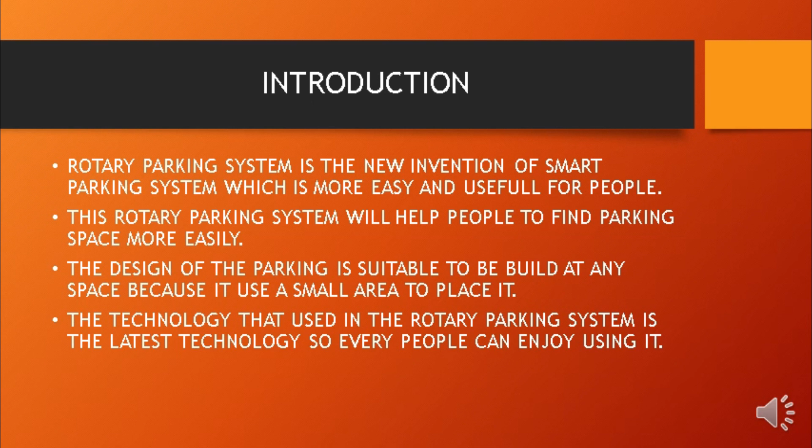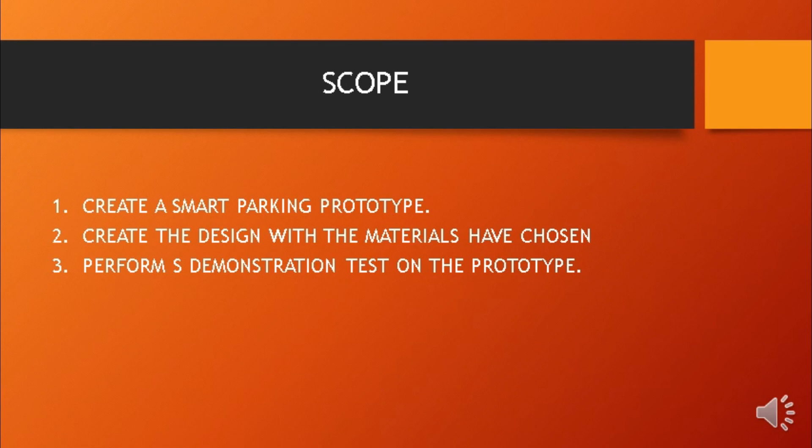The scope of project: first, we create a smart parking prototype. Second, we create the design with the materials we have chosen. Third, perform demonstration tests on the prototype.

The problem definition: first, it is an impact on society and environment, which is we can see the parking lot that already uses a large area that consumes a lot of space needed to build a parking lot. For the rotary parking system, we use a small space to build it.

Second, time - waste more time to find the empty parking space. Third, traffic problem - hard to find parking space. People always will park their vehicle at the side road, which is illegal and make the traffic flow jam.

Fourth, it is about safety. Less safety factor makes people more worried about their vehicle at the parking lot.

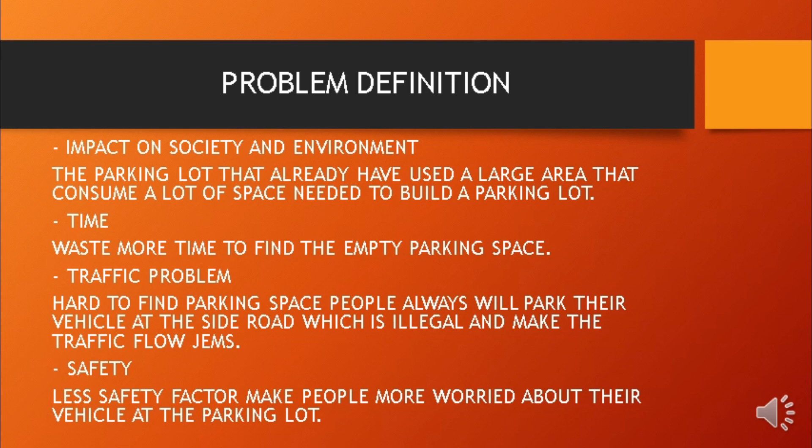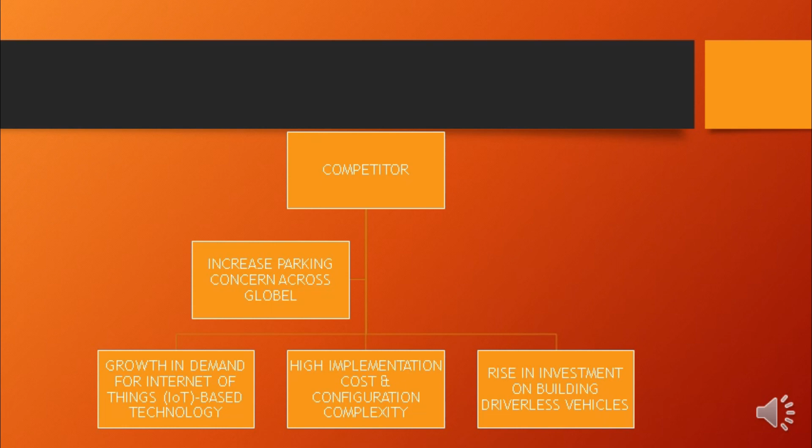That's all for me. Thank you.

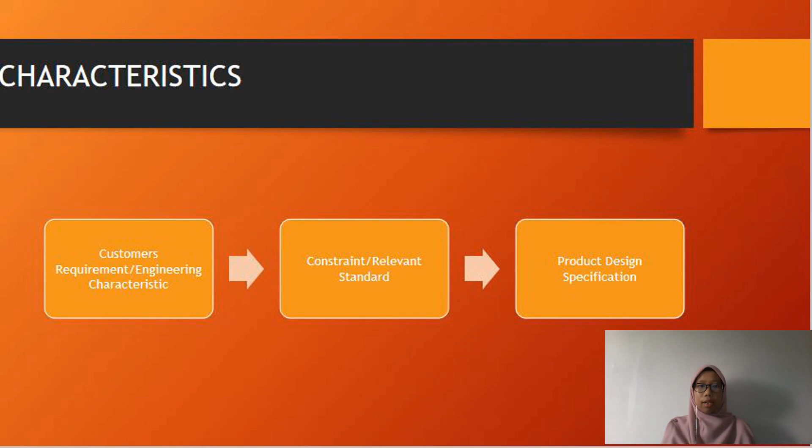Design parameter: there are characteristics needed for design parameter. There are three - first, customer requirement or engineering characteristic; second, constraint or relevant standard; third, product design specification.

First, customer requirement or engineering characteristic. CR is gathered from the customer need to develop the product. And EC is from the product mentioned in the product specification, for the customer to understand the system clearly.

They are such as: if customer requires quick entrance, easy payment, and empty space parking auto detection, so we must include engineering characteristics such as systematic entrance, systematic payment, and a warning buzzer beep sound for the auto parking detection.

And also, if customer requires a big parking space, less failure, and weatherproofing, so we must conclude that we must design the area of the smart parking, and we include the probability of failure, and we must make the parking spot resistant to weather.

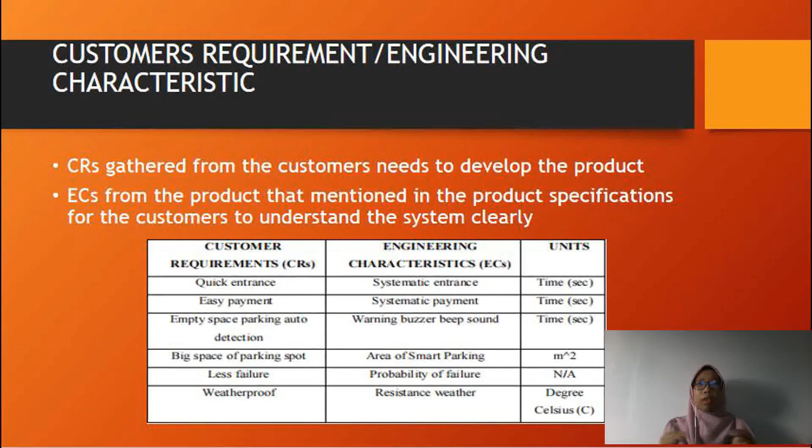The second one is constraint or relevant standard. There are few constraints in this project, such as limitation of scope, cost, specific design requirement, vehicle capacity, environment, and new feature.

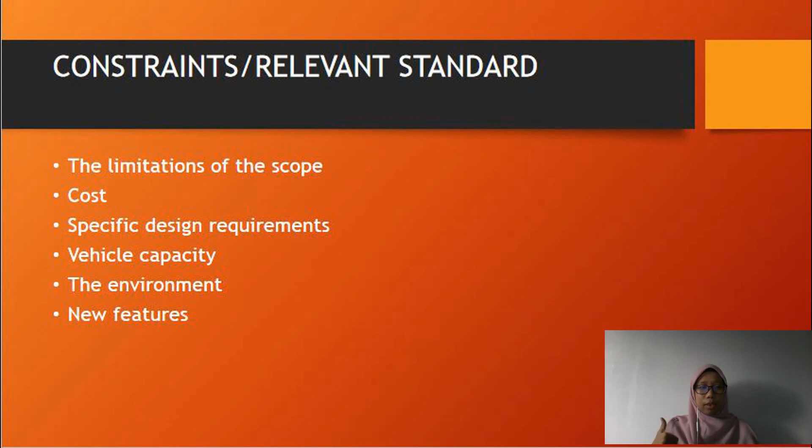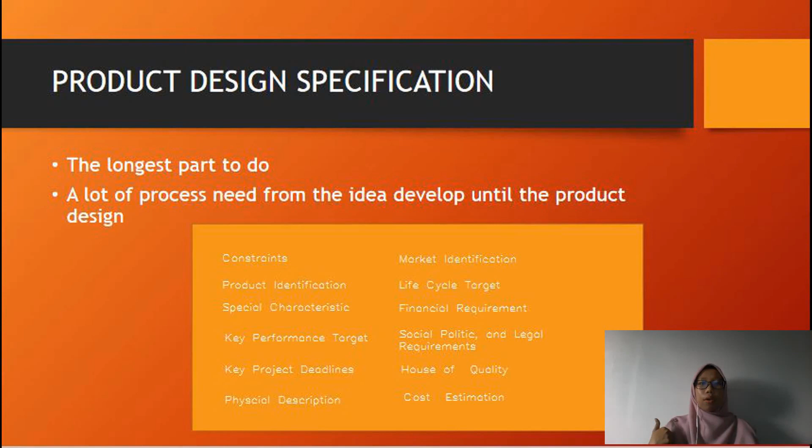The product design specification, or PDS, is the longest part to do, and a lot of process is needed from idea development until the product design. This includes constraint, product identification, special characteristic, key performance target, key project deadline, physical description, market identification, life cycle target, financial requirement, social, political and legal requirement, house of quality, and cost estimation.

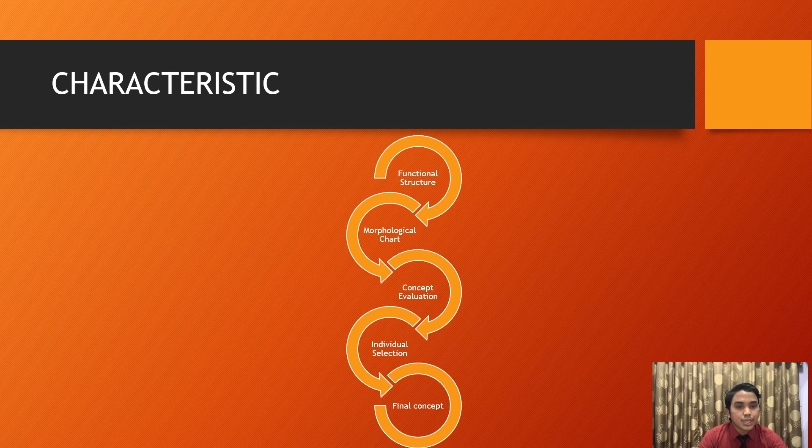I will present about the concept design of the rotary parking system (RPS). A flow of method had to be followed in the design of the rotary parking system, beginning with concept generation, which includes a functional structure and a morphological chart, and ending with concept evaluation, which includes screening the idea, creating a Pugh chart, objective tree, and weighted decision matrix. After that, it will be complete with the final concept.

Function structure. Based on the figure, it shows the function structure of the rotary parking system. For the first step, make a parking payment to enter the parking area. Then park the vehicle on the platform provided. Next, leave the vehicle and put the code on the system provided to park the vehicle. After the code is inserted, the rotary parking system automatically functions to pull the vehicle inside the building. Finally, the mechanism rotates vertically in order to store the car.

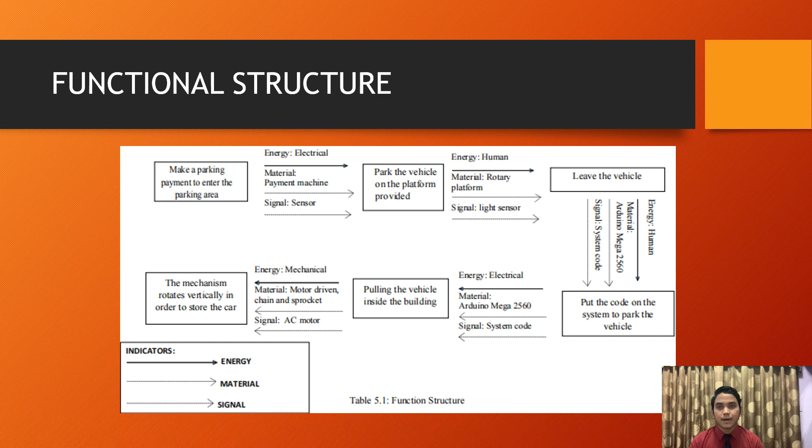Morphology chart. A morphology chart is a technique for visualizing and exploring all of the relationships in a multi-dimension problem. It is one of the most important techniques in the process of developing a product design. We present many concepts based on specific needs that must be met. The morphology chart representing required product parts must be referenced in the design idea, and it illustrates several components that must be considered to produce the most effective and appropriate idea.

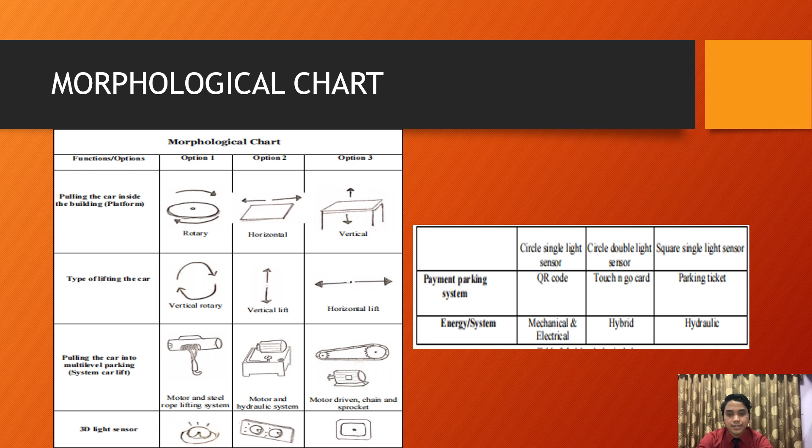The morphology chart for this product needs to be agreed upon by each group member to produce the best product design. As shown in the table above, there are three types of solutions for each function.

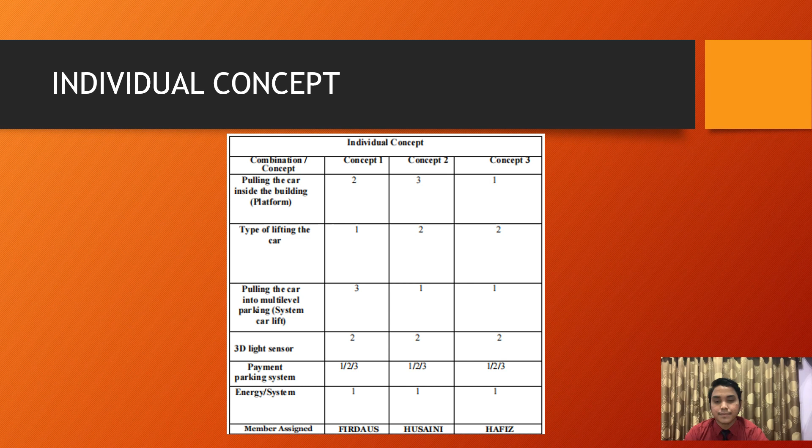Individual concept. As shown in the table, these are individual concepts for the rotary parking system. We present three concepts to produce the rotary parking system, in order to select the best product.

Individual concept 1. This concept is made out of a single automated mechanical system that spins perpendicular to the ground. Car parking and retrieval are dependable in this manner. It rotates in a circular motion powered by the reducer, and the transmission device rotates the parking pallet for automobile parking and retrieval.

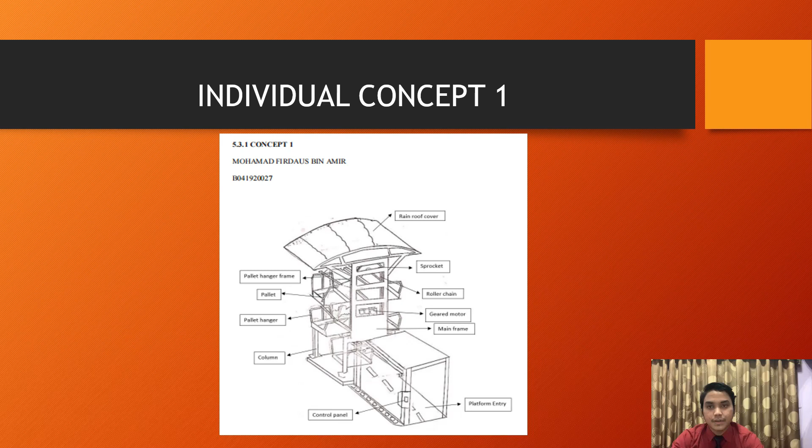Individual concept 2. This concept is a system meant for parking cars in tight spaces, like driveways, thus using the space most effectively in small and middle-sized buildings. The system operates in a manner similar to a conveyor type chain drive arrangement. It can be installed in underground basements as well as podium levels. The operating principle of this concept system uses a lift to move the car up and down, and the lift can be utilized to put the car into the cycle.

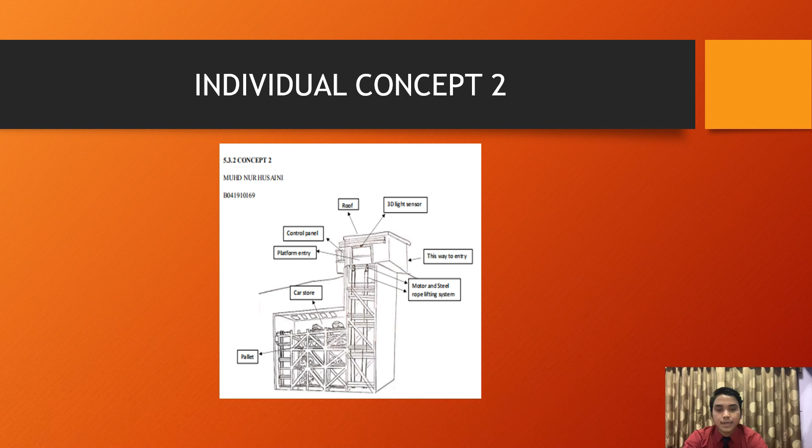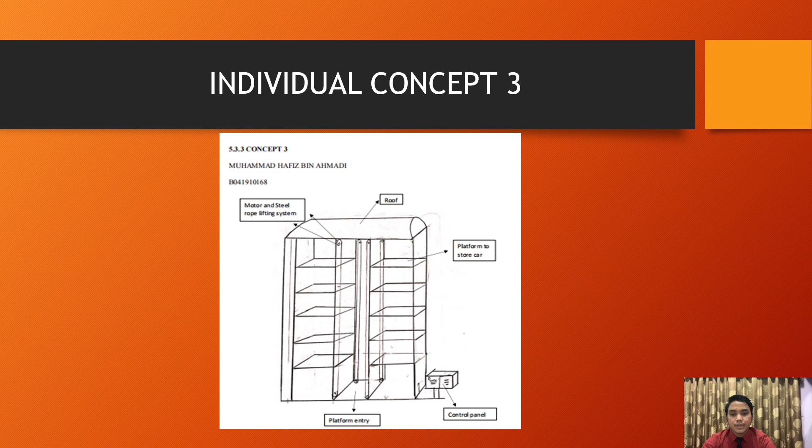Individual concept 3. This proposal makes use of a trail system and a vehicle lift to park the vehicle. When a car enters the parking lot, the trail system will drive underneath and elevate using hydraulics, allowing the vehicle tire to sit perfectly in the tire area on the trail system. The trail system will then go to the lift to store the automobile in its original parking spot.

Concept evaluation. Screen method, absolute criteria. A screening technique is a method for extracting, isolating, and identifying a set of components in a sample which favors speed and little sample modification. Essentially, a screen method is a straightforward assessment with a yes/no result. As a result, all concepts are qualified to execute a realistic project during screening 1.

Entering filter 2, concept 2 had some decisions or might run into issues during the process, such as the probability of jamming or the safety and cost of the product. Only concept 1 is qualified to run this project in the final screening. Meanwhile, concept 2 and concept 3 need to improve and revise further in term of design.

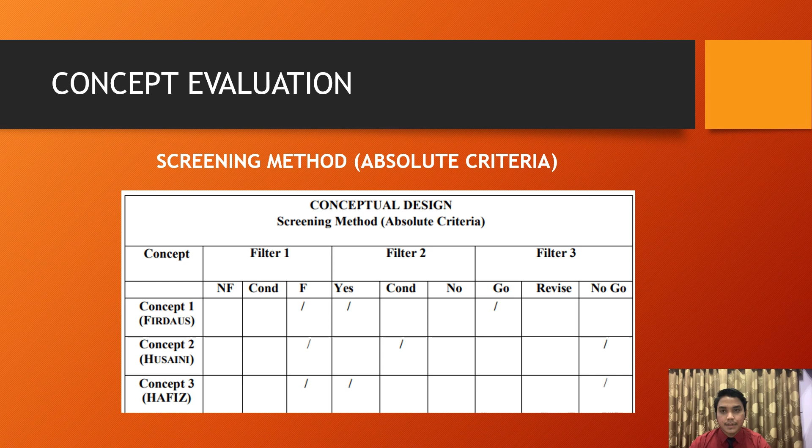Screening method, relative criteria, as shown in the table, this is Pugh chart 1. In the first phase of the Pugh chart, we use items currently on the market as the datum guideline for our concept. Concept 2 may be excluded based on the chart result since its negative rating is larger than the other two concepts. Because concept 1 has the most pluses, it will be chosen as the new datum.

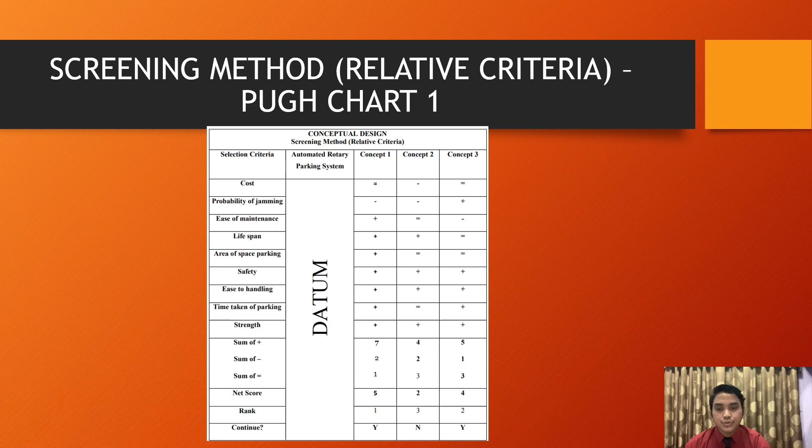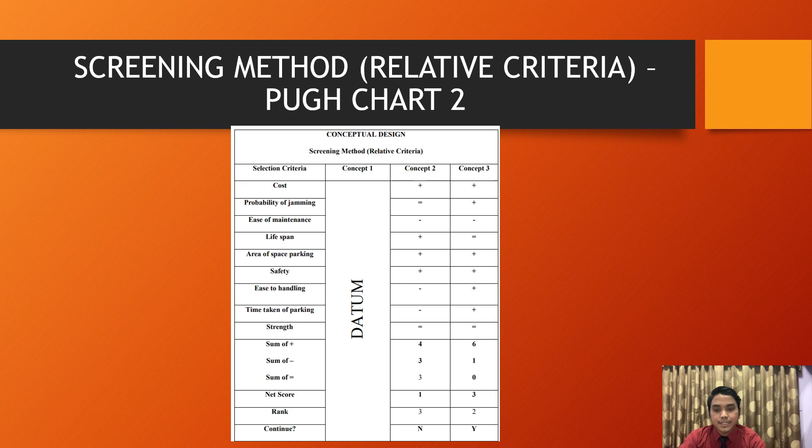Screening method, relative criteria, Pugh chart 2. This table is Pugh chart 2. Concept 2 can be eliminated in the second phase of the Pugh chart because it has many disadvantages compared to concept 1 and 3. Both concept 1 and 3 will be selected and carried forward to the weighted decision matrix to be considered as the project's final concept.

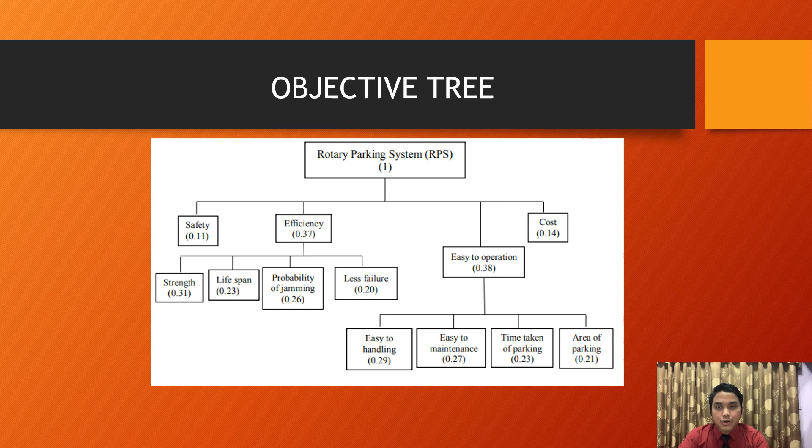Objective tree, rotary parking system. This table is objective tree. Objective tree is a strategy for identifying design criteria that will be used to evaluate a concept. This information is contained in the product design specification. The main design requirements of our project are safety, efficiency, ease of operation, cost, and others. Weighted decision matrix, WDM.

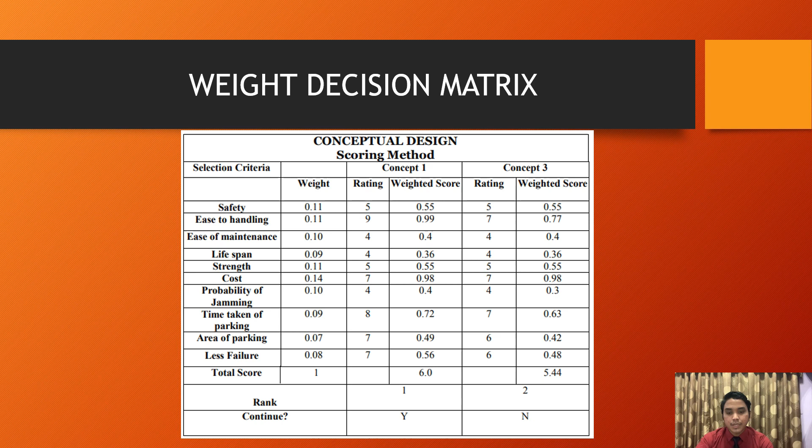As shown in the table, this is the weighted decision matrix. The value we obtain from the computation will be utilized to select the optimum concept based on weight factor, score, and assessment. The number of evaluation is computed for each idea based on the calculations of the idea and their corresponding criteria. Of the total ratings represented in the table, concept 1 has the highest rating of 6.0, while concept 3 has the lowest rating of 5.44. Concept 1 was chosen as the final concept to be developed.

Final concept. This figure is the final concept. After the weighted decision matrix technique, concept 1 was selected as the final concept. This concept is made of a single automatic mechanical system that rotates perpendicular to the ground. This final concept is safe to use for customers.

This parking system is a parking device with circular motion in a vertical plane, composed of a metal structural frame, carrier, drive system, control system, and safety and detection system. The motor drives the transmission mechanism through a speed reducer, and a storage plate is installed at a certain distance on the traction component, the chain. When the motor starts, the plate moves along with the chain to achieve the purpose of accessing the vehicle. This mechanical equipment is designed to provide parking based on pallet circular movement.

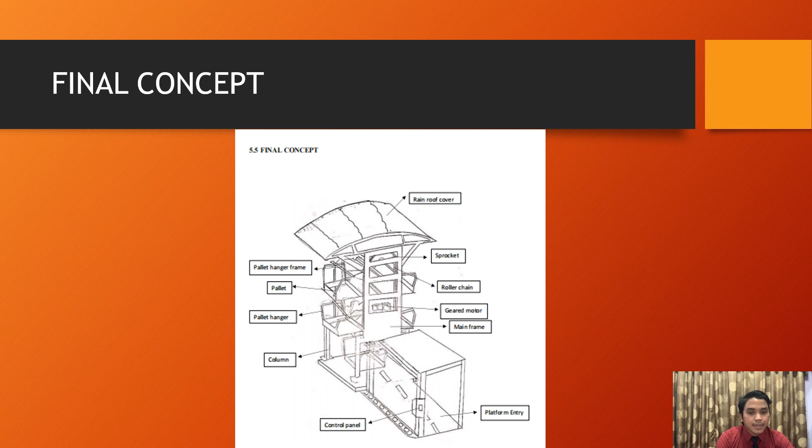Beautiful appearance, stable operation, low noise, reliable braking, short access time, high automation, and easy to operate and maintain.

Product technical specification. There are components needed to fulfill our project of the rotary parking system, such as a rain roof cover to protect the vehicle from extreme weather, control system, sprocket, frame to hold the heavy load, chain, shaft, and pallet. Pallets are usually used as a clear location where automobiles can park. We also have a fence to keep the parking lot separated from the pedestrian path, bearing, rod, motor, guide rail, column, and also Arduino Mega 2560.

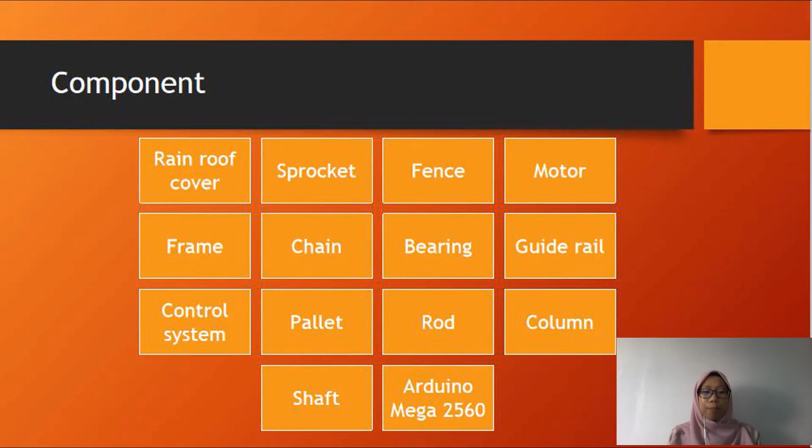Materials, process, tools. Firstly, we need to find all the materials and tools. After that, we identify the process needed, and the component will go through processes such as cutting, welding, grinding, drilling, and lastly assembly.

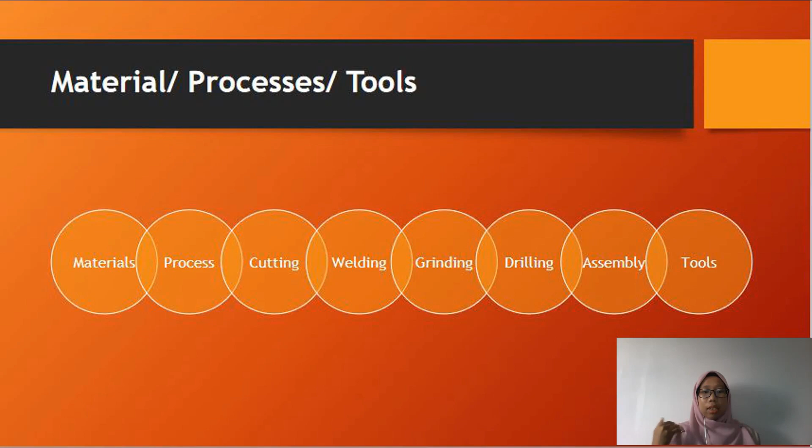I'm going to explain about the embodiment design. Basically, in embodiment design, we analyze the product from its components until how a human uses the product. First, we have finite element analysis. In finite element analysis, we carry out analysis on some of the parts. So what are the things that we analyze? For each part we are going to analyze the durability, endurance, and strength.

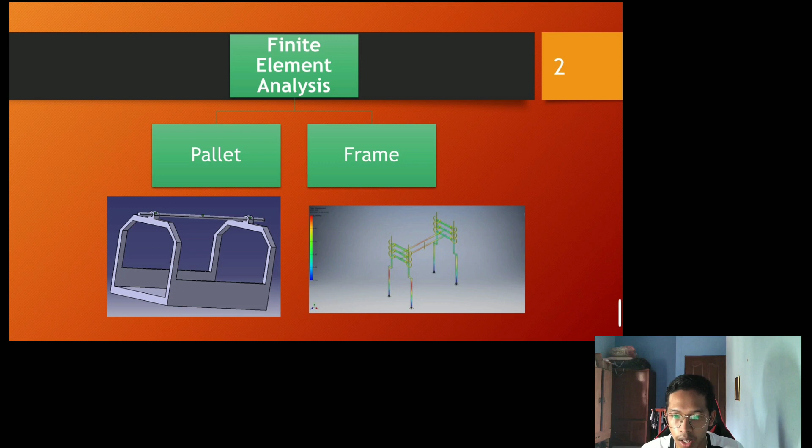M1, the pallet lower part, is equal to 0.8 kg. M2 is equal to 0.2 kg for the pallet first upper part, and M3 is equal to 0.2 kg for the second upper part. So the total mass on the pallet is M1 plus M2 plus M3, equal to 1.2 kg. The mass of the car is equal to 0.25 kg. Mass on the chain plus mass on the triangle is equal to 1.8 kg. The total number of cars is equal to 6, so the total mass of the cars is 6 times 0.25, equal to 1.5 kg.

Mass total on pallet is equal to 6 times 1.2, which is 7.2 kg. So the mass on the system we can get is equal to 10.5 kg.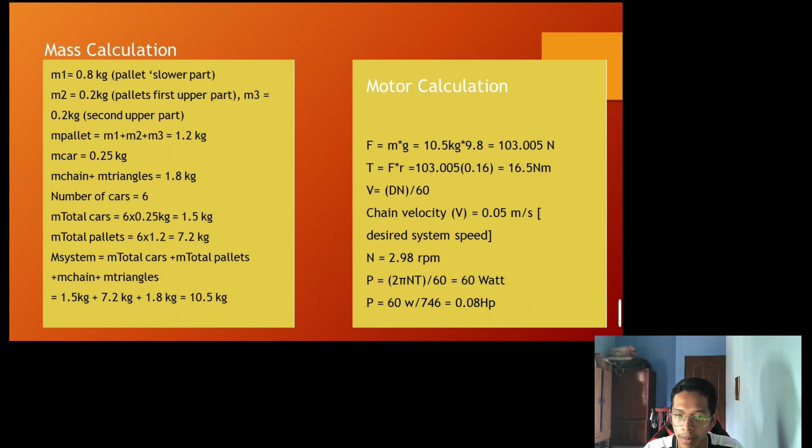Next, on pallet calculation. The vehicle specification is 300 mm times 100 mm times 150 mm. Mass on vehicle is 0.25 kg.

Pallet specification: thickness is 10 mm, length is 400 mm, width is 200 mm, height is 400 mm. Mass of vehicle is 0.25 kg. So total load on pellet equals weight of vehicle plus weight of pallet, which is 0.25 times 9.81 plus 0.05 times 9.81, equal to 2.94 Newton.

On the rod calculation, the specification on rod is length 750 mm, diameter 18 mm, mass of the pallet is 1.2 kg. So the total load on rod equals weight of vehicle plus weight of pallet, 0.25 times 9.81 plus 1.2 times 9.81.

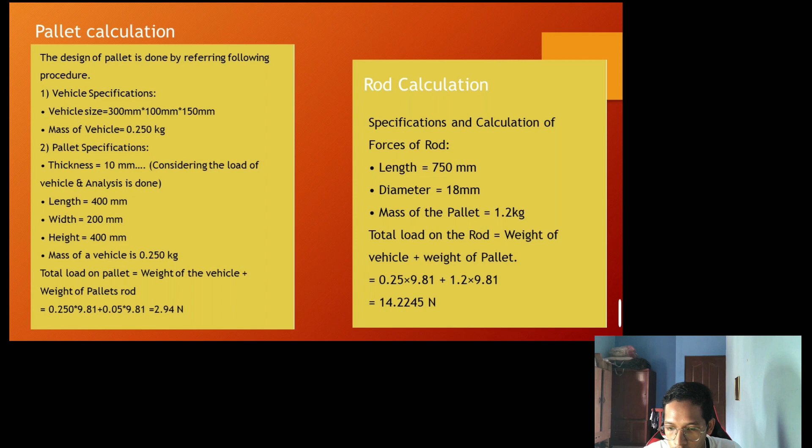This is equal to 14.2245 Newton. On the joint calculation, the total load on joint equals weight of vehicle plus weight of pallet plus weight of the rod, divided by 2, which equals 10.06 Newton.

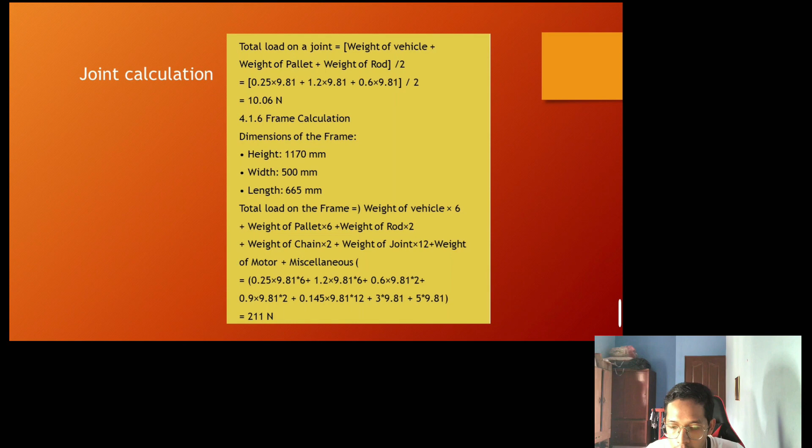On the frame calculation, dimension of the frame: height is 1170 mm, width 500 mm, length 665 mm. So the total load on the frame equals weight of vehicle times 6, plus weight of pallet times 6, plus weight of rod times 2, plus weight of chain times 2, plus weight of joint times 12, plus weight of motor and miscellaneous. So we can get 211 Newton.

Next, we are going to explain about the design for manufacture and assembly. From the chart we can see all the parts combined, and then assembled into assembly 1, assembly 2, and assembly 3 until it's complete as one system.

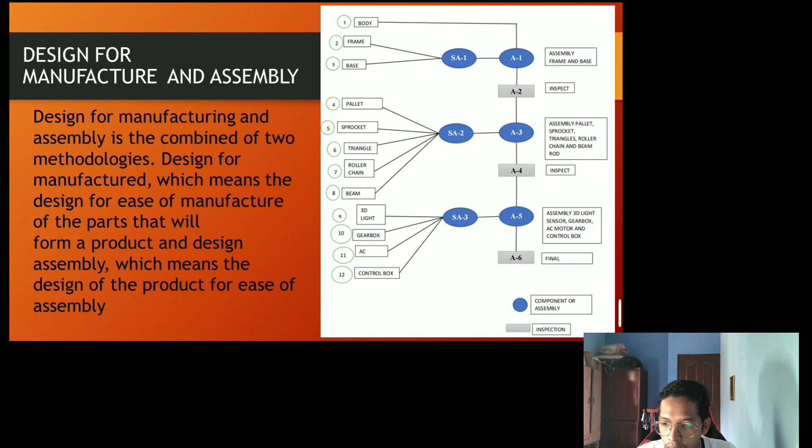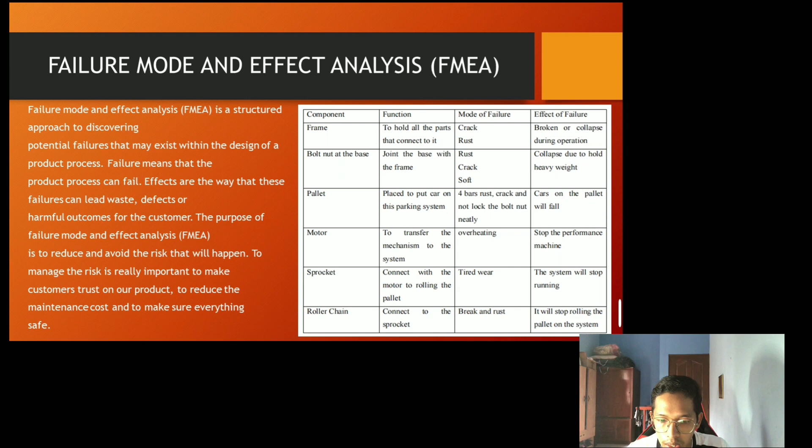Next, on failure mode and effects analysis, FMEA. FMEA is developed for early prediction on this product. In this chart we have 4 columns: component, function, mode of failure, and effect of failure. The prediction of the FMEA helps engineers reduce maintenance costs and make sure everything is safe.

We can conclude that higher RPN and crit on the frame and pallet can be an issue. To overcome this, engineers need to do daily service or checkup of the frame and pallets, and take precautions such as welding cracks, painting the surface properly, or using anti-rust spray to avoid corrosion.

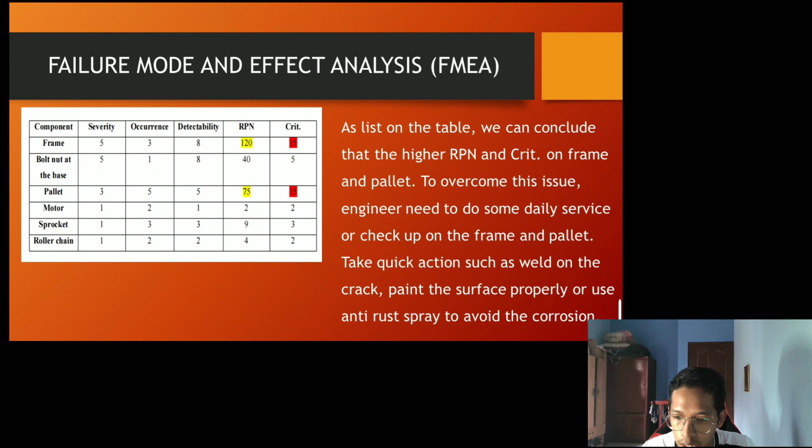On the human factor, we are going to explain how humans use this product with the technologies, and of course the ergonomics. In this chart we can simplify and understand how the system is running.

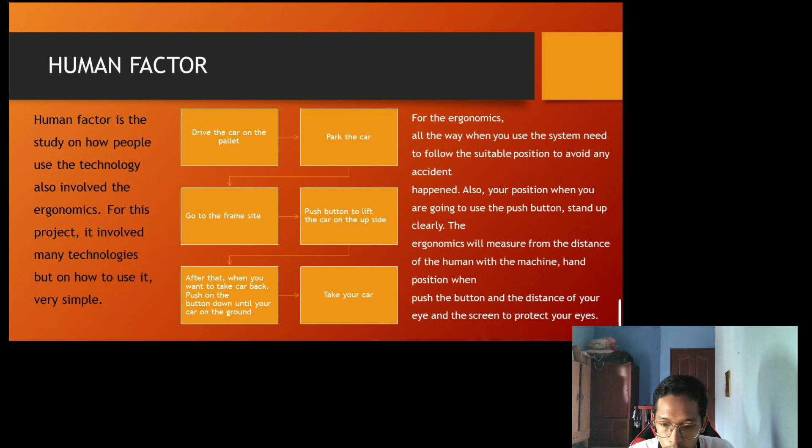First, drive the car onto the pallet, park the car, go to the frame side, and push the button to lift the car upside. After that, when you want to take the car back, push the button down until your car reaches the ground, then take your car.

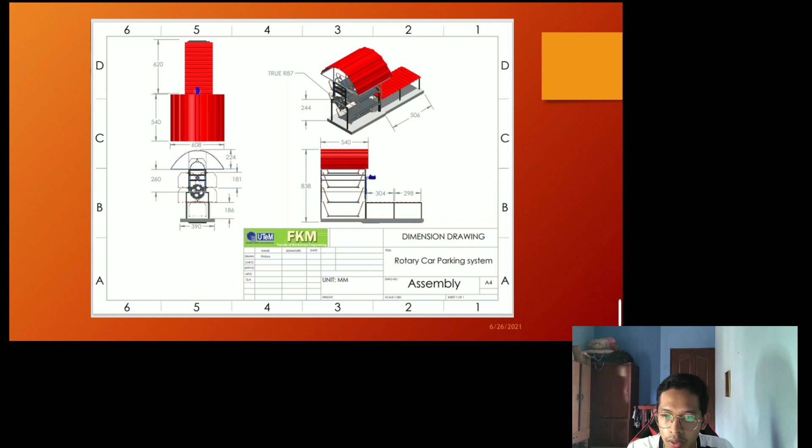In conclusion, we can conclude that the multi-level parking management system is created and manufactured to minimize automobile parking space and provide a safe system for users to park their cars, as well as to make their routine life easier by preventing them from being stranded in parking buildings while searching for empty parking.

This will also argue for the client to consider having this product at their facility to make it easier for customers to park. Following the development of the concept, design, and selection of a final idea, the next step in the design process is to create a preliminary design for each system component. The overview of the preliminary design often includes the design system's fundamental needs and high-level design aspects. That's all. Thank you.